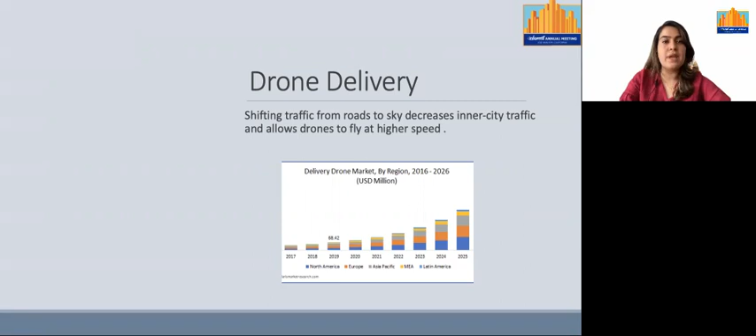On the other hand, drones have some operational limitations and critical constraints, for example their limited flight range or payload limitation.

So a hybrid fleet of truck or any other vehicle with drone would be the best practical way to solve the last mile delivery problem, because using a hybrid truck-drone fleet we can overcome the short range and payload limitations of drones as well.

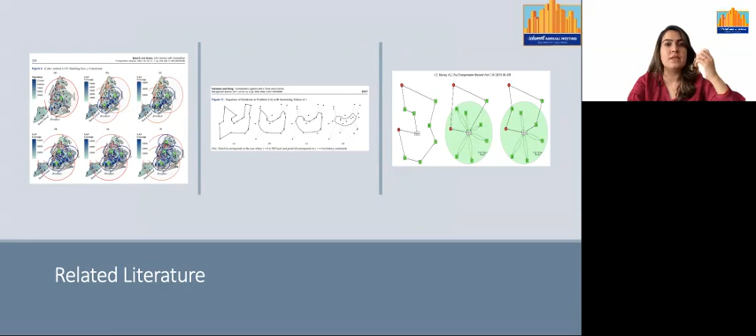There has been a wide range of academic research on drone delivery, or even on truck and drone delivery, using different methods and approaches like network design or solving VRP or TSP. For example, in this article by Carlsson and Song, they tried to solve this problem using a hybrid fleet of one drone and one truck to solve a TSP problem.

In this figure, you can see different scenarios based on different battery limitations. On the left, it has been considered that the drone battery limitation is 0, so the drone can't fly at all, and you can see that there is no drone flying. In the right scenario, they increase the battery limitation to infinity, so the drone can fly as much as it wants.

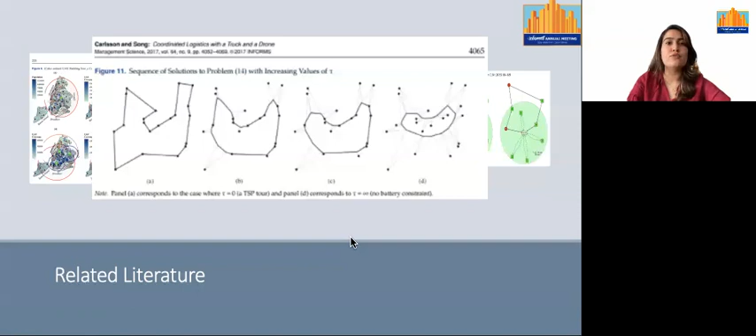We, on the other hand, decided to use a stylized model. We considered a stylized model to address this problem because stylized models are abstractions of reality, which avoid unnecessary complexities while providing a powerful tool for analyzing different scenarios and proposing different policies.

I also want to mention a recent review article on the future of drone delivery. This article mentioned that the most challenging problem of a hybrid drone and truck delivery is synchronization between the operation of different vehicles, trucks and drones, and the scheduling between these two operations is the most challenging part of hybrid fleet and drone models.

This research also strongly encouraged researchers in this field to consider drone operational limitations, which are related to flight range, battery capacity, battery life, speed, and payload limitations, which is what we clearly addressed in the current research.

So we consider a stylized model of N recipients on the circumference of a unit circle, with the depot at the center of that circle. As I just mentioned, we consider that the truck leaves the depot with both drones and packages.

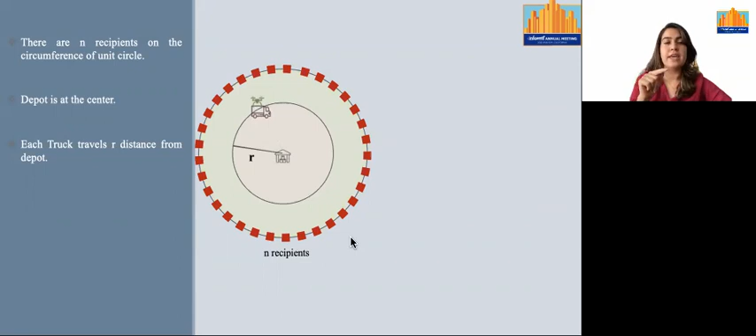It travels a distance of R, then travels along an inner arc and launches the drone to do the deliveries. So the truck stops at some points on its path, launches the drone or drones, and the drones do the deliveries, and then the truck retrieves the drones at another point on its path.

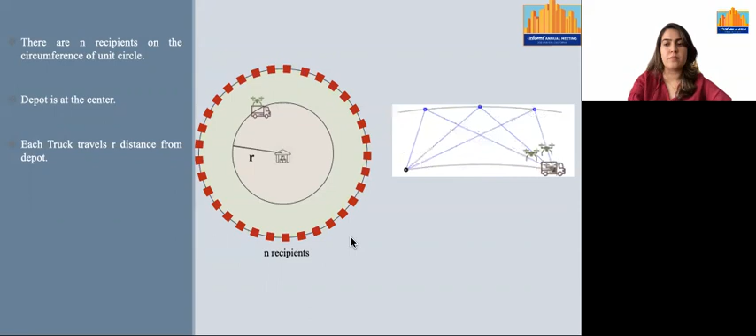We tried to model this problem with a limited number of decision variables and show different scenarios based on these variables. The first variable is the travel distance of the truck, and the next is the number of recipients served by one truck. The truck travels a distance R from the depot and is responsible for serving xt number of recipients, then stops at M hubs along its path.

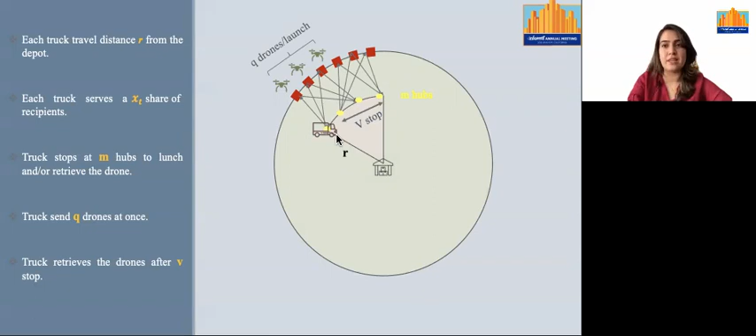At each stop, at each hub, the truck can launch or retrieve drones, or do both launching and retrieving. At each launch hub, the truck will launch a batch of Q drones at once, and it will retrieve this batch after V stops. So I'm going to show you some scenarios based on these decision variables.

I'm also going to introduce two important concepts: relaunching and multi-launching. In part A of this figure, you can see multi-launching, which means launching more than one drone at once. Here the truck launched 3 drones, so Q is equal to 3. Then the truck retrieves the drones after just one stop, so V is equal to 1. We have a total of 2 stops here.

Part B of this figure shows relaunching. Here the truck launches 1 drone, Q is equal to 1, and retrieves that drone after 1 stop, so V is equal to 1. But then the truck relaunches this drone again, and again. So we have 1 drone that flies 3 times, and we see a total number of 4 hubs, M is equal to 4.

In part C of this figure, you can see a combination of relaunching and multi-launching. A truck launches 3 drones, retrieves them after 1 stop, relaunches them, and retrieves them again.

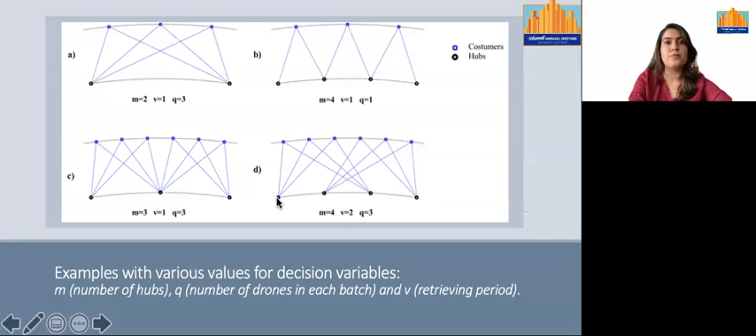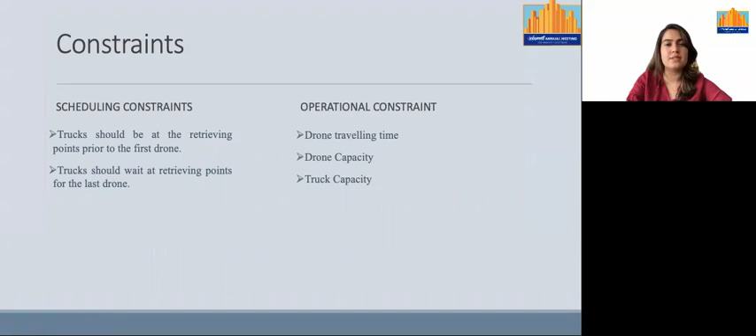We have 2 important sets of constraints in our problem: the scheduling or synchronization constraints, and the operational constraints. I believe I mentioned these two sets before, but I'll explain them in more detail. Operational constraints relate to both truck and drones. The one related to truck operations is truck capacity, which is limited, and two other important constraints are drone operation — the drone range limitation and capacity limitation.

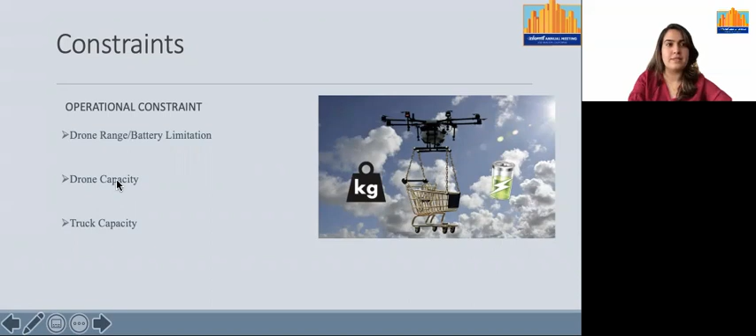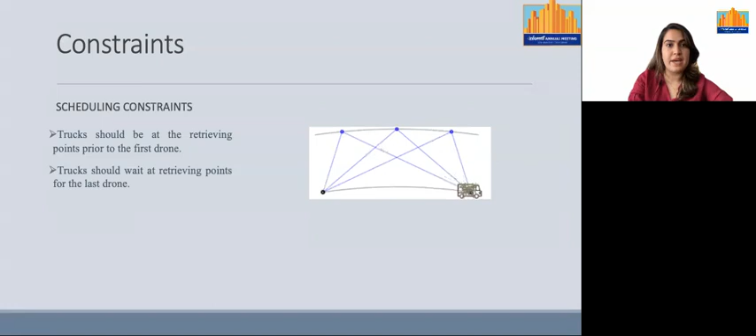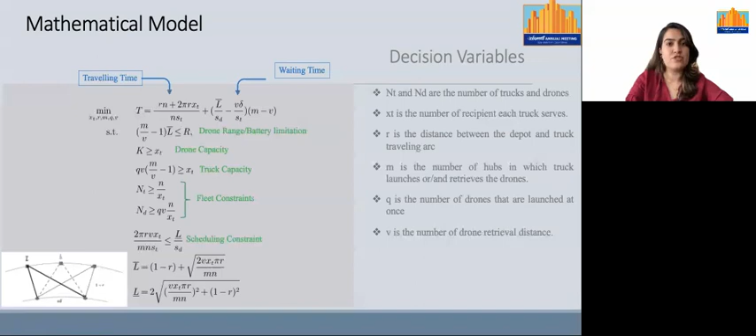For the next step of our work, we want to optimize the fleet and derive a closed-form expression, then obtain some meaningful insight into the problem. We also want to consider a random customer distribution, so instead of N being a fixed uniform distribution, it would be a random distribution. Thank you for your attention.